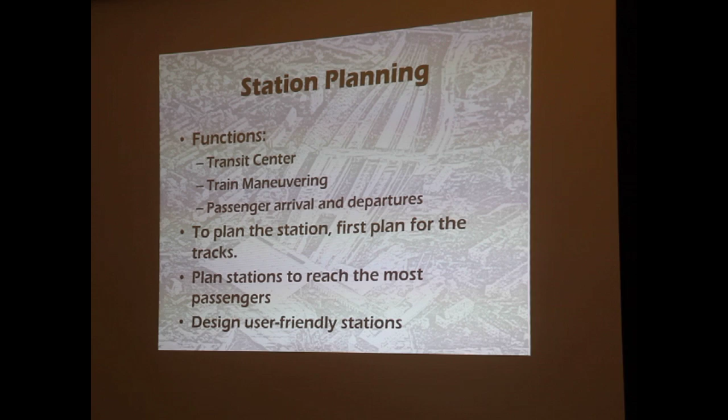Stations must reach the most passengers, so it's important to put them in the core of a location, never out in the field somewhere. It's really funny, the French have something called a beet field rail station. And beet fields are rail stations that they cheaply built out in the middle of, outside of town. So it just illustrates the importance of putting a station inside where people are going to use it. And then you've got to make the stations user-friendly.

Stations need to serve as a gateway to the city. They've got to be located within the city fabric in a central location to be supported by TOD, which we'll get into here in a bit. They've got to become accessible locations for pedestrians. That's going to be the primary means for anybody within that central area where the station is to access it, through pedestrian means.

And they've got to support public and multimodal transit because not everybody obviously can locate in one spot. And we've got to discourage automobile use, but responsibly handle parking situations by tying it into the urban fabric, maybe putting it underground, maybe concealing it away behind a building.

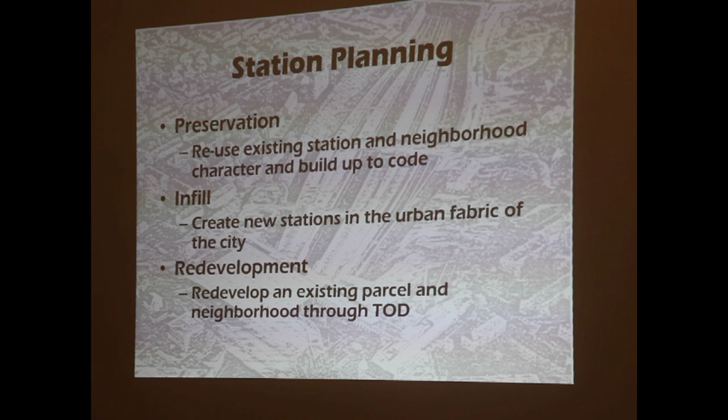Station area planning is, you have to focus heavily on preservation. Rail's been around in America for 150 plus years, 160, 170 now. And so, reusing existing stations and the neighborhood character to build up to the code. You need to employ infill mechanisms to create new stations in the urban fabric of a city if you can't use an existing station. And you've got to use station planning for redevelopment initiatives, redeveloping existing parcels and neighborhoods through transit-oriented development.

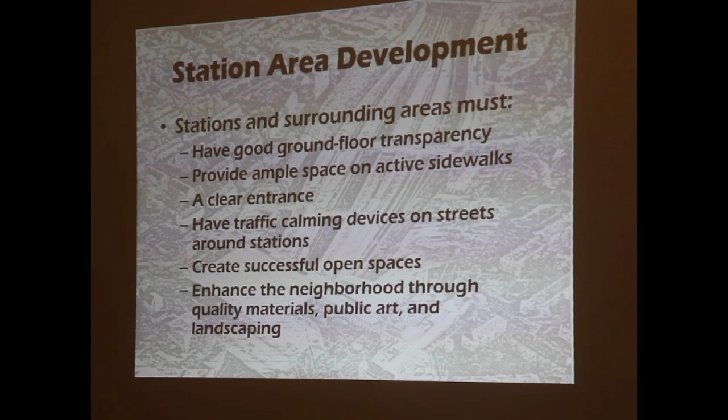Stations and surrounding areas need to have good ground floor transparency. They need to provide ample space on active sidewalks. They need to have a clear entrance that denotes where the train station is. It has to be a location. Of course you've all been in Penn Station or Grand Central or South Station, but you know you've arrived somewhere when you come to the train station.

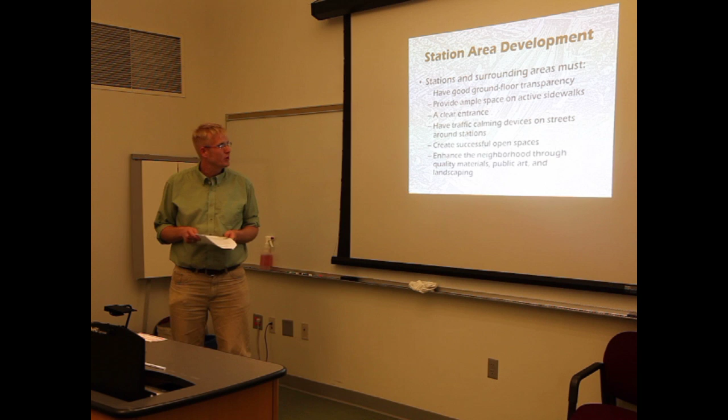They need to have traffic calming implementations all over the streets around the stations. These are important to make it a place where pedestrians can operate in the area. They need to also have successful open spaces around. And they need to enhance the neighborhood through quality materials, public art, and landscaping.

Density, TOD, land use, and land use guidelines. One of the most crucial things to implementing high-speed rail and having it be successful is that you have to dedicate the land use to high-density development around station areas. It removes the friction of distance, so you might as well remove it from the station area as well. You're gaining this huge asset, increasing your accessibility and mobility through high-speed rail. Why not also make the community around it accessible to pedestrians and transit?

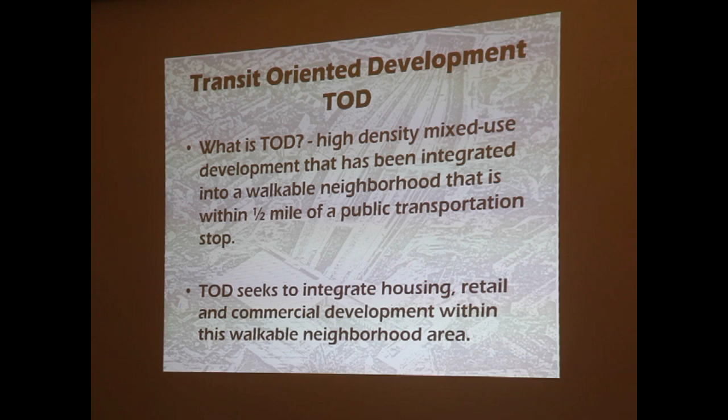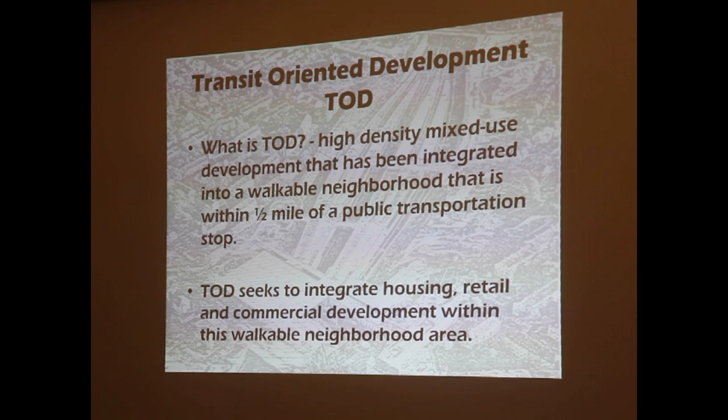So transit-oriented development, what is it? TOD is known as high-density mixed-use development. It's development that's been integrated into a walkable neighborhood that is within 1/2 mile, and actually, as Wayne pointed out, people are willing to walk a bit further, so it should also probably include the 1 mile catchment area. TOD seeks to integrate housing, retail, and commercial development within that walkable neighborhood area.

So how does it apply? Typically, we read about TOD being a component of bus and local city transit. How does it apply to high-speed rail? Planning for TOD occurs at a lot of different levels: the regional, corridor, station area, and parcel level. High-speed rail focuses primarily on the region and the corridor level, but local planning, the station area, and the surrounding parcels are also very important to maximize the potential.

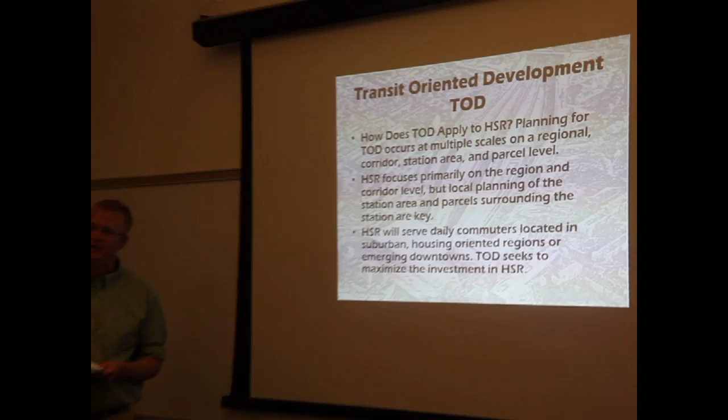High-speed rail often serves daily commuters in suburban station areas. These are housing-oriented regions where there's not really an existing downtown. So places on the California high-speed rail route like Gilroy, San Jose, those are what you could call an emerging downtown or suburban commuter area. And TOD will seek to maximize the investments at any of these places, not just in big cities.

So in order to assess what is needed to develop high-speed rail, it's important to know what sort of typologies you have in your high-speed rail station areas. There's a group called SPUR out of California, and they've identified 5 different land use typologies. These are traditional downtowns and central business districts. New York City, Philadelphia, Boston, Washington, San Francisco would be good examples. These are large cities, they have a dense core, and land values are very high.

You have emerging downtowns and new business districts, which are what you could call like San Jose, California, you could call maybe Albany, not really sure, that might be a market challenged downtown. But these are cities that are smaller, they have lots of potential, they're located in a region that is prosperous, and there's no reason they too can't be a part of that larger agglomeration economy.

Suburban commuter stations are going to play an active role in high-speed rail land use planning. Not every train is going to stop in a big city. It's also going to have to pick up commuters from different places or passengers or travelers. Airports are also going to play another role because whenever you develop around an airport, we'll get to this in a bit, you've got to maximize the amount of connections plus the land use around an airport, which has a lot of uses.

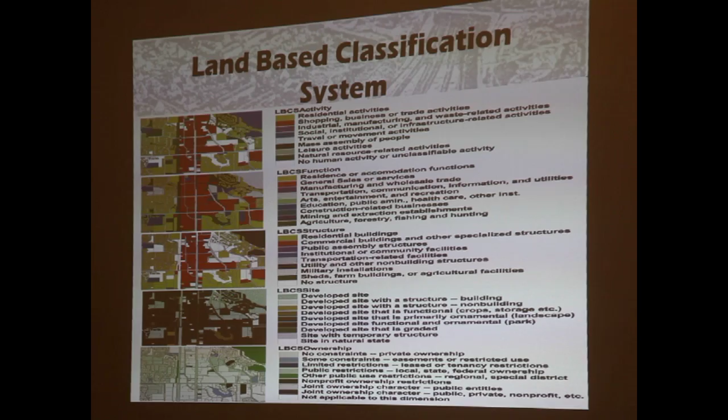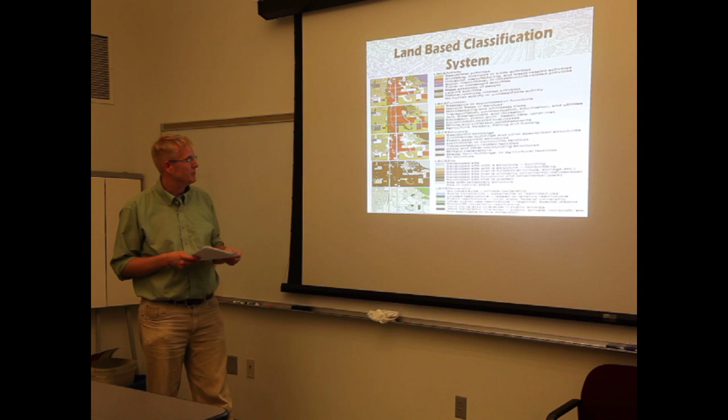There's a structural level to it, where it talks about what kind of buildings are located, whether they're apartments, residential buildings, institutional or community buildings. There's sites which talk about if they have buildings or not, and then there's an ownership level which demonstrates if it's private, public, or not applicable at the bottom.

So conclusions and recommendations for implementing high-speed rail. The big issue is pedestrian-oriented with lots of transit connections. They need to be situated in central cities to capture increased ridership and focused development. They can be used as a tool for shaping the built environment. It's important to understand the city's typologies where high-speed rail is implemented to create the best use of the cities.

To create high-density mixed-use development, serving a wide variety of uses, incorporating transit-oriented development into station area development, and then making use of the APA's LBCS land use classification system to standardize station area planning across jurisdictions.